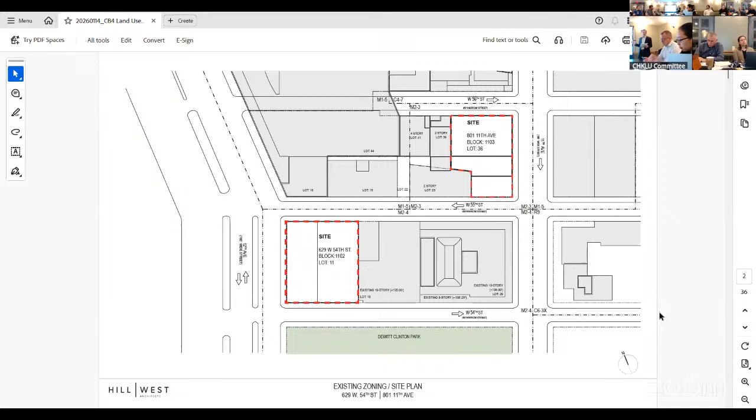We have the existing zoning map. So the 12th Avenue site is located in an M2-4 district in sub-area C2 of the Special Clinton District. The 11th Avenue site is located in an M2-3 district in sub-area C1 of the Special Clinton District.

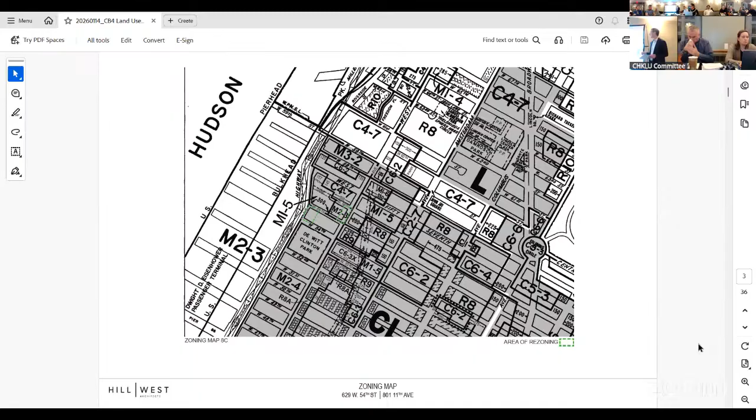Next slide, please. So taking a closer look at each of the sites, starting with the 12th Avenue site. The images here, particularly images 2 and 3, provide views of the site looking east across 12th Avenue. The 12th Avenue site is currently occupied by a 6-story building which includes an auto showroom and service center. Next slide, please.

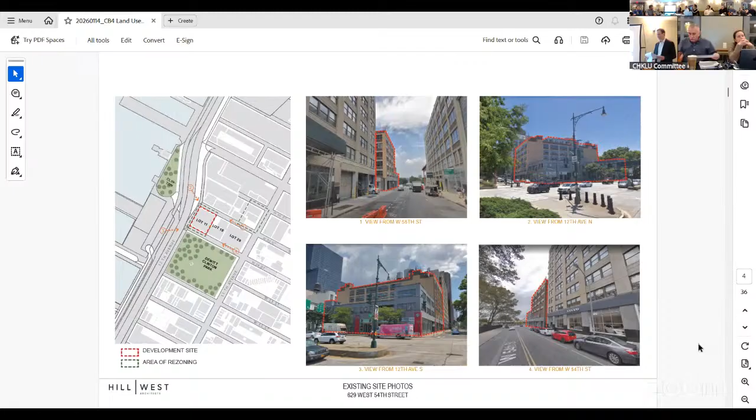Here we have a site plan of the 12th Avenue building. We're proposing a 44-story mixed-use building. The 3-story base will include 84,349 square feet of commercial auto showroom use, and the portions above will include 421,000 square feet of residential use. This will produce approximately 617 units, of which 154 would be affordable. I'll hand it over to Dave West to describe the design in more detail.

So the site plan generally, we have a 3-story commercial podium underneath a residential development. There are street walls on either side. This one is 12 stories, this one on 55th Street slightly higher, 13 stories, tower sits here, reaching a maximum height of 44 stories. The tower is oriented north-south to minimize solar heat gain as well as present its narrow face to the park. It's also positioned as far east as possible to maximize separation from the Hudson River and its park.

A 3-story podium fronts on 12th Avenue and wraps around West 54th and West 55th Streets, replicating the existing street wall condition, which is currently defined by a 2 to 3-story commercial building that sits along the 12th Avenue frontage. Go to the next slide.

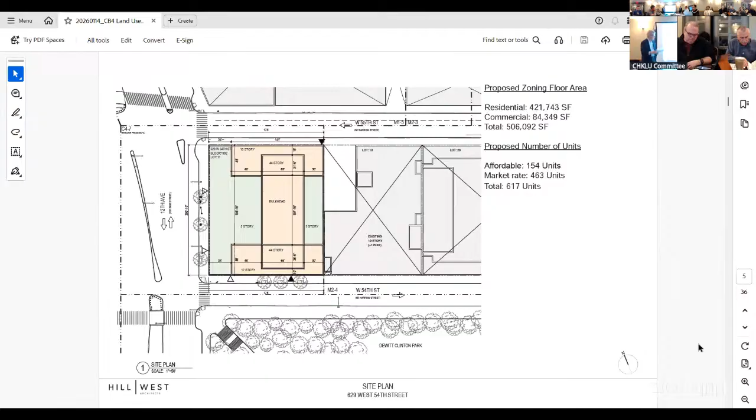The ground floor consists of both commercial and residential uses, with commercial entrances along the 12th Avenue frontage and the western portion of the West 54th Street frontage. The residential entrance is going to be located on West 54th Street, across from DeWitt Clinton Park. This creates a visual relationship with the park and will serve to activate West 54th Street, which is an important pedestrian corridor. Next slide.

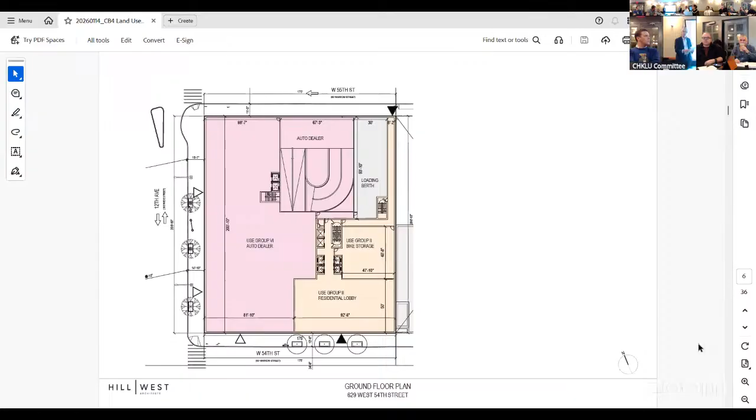Okay, so here you can see it better. There's a kind of step in the street wall. You see we're picking up the character of the existing buildings there, but we're not trying to be exactly the same. Instead, we're stepping down towards the avenue. We think that's a nice architectural move, and it kind of completes this curve that comes in here, focused on the corner. So there's a rhythm there. We put a slightly taller street wall on 55th Street just because we think that's a slightly less impactful place for that.

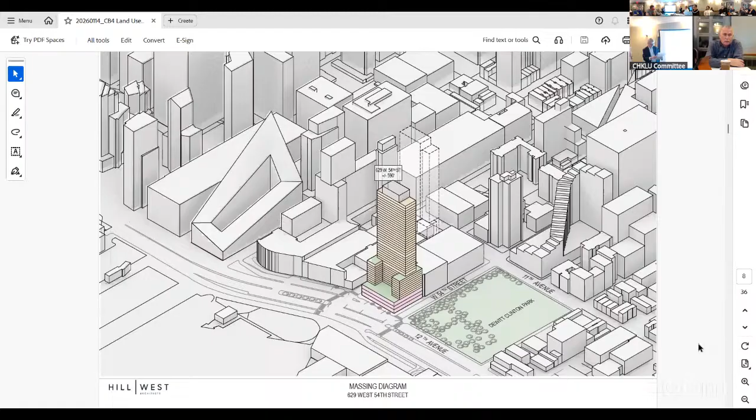Let's move on to the next slide. Okay, here you see the rendering. So we created this little inset between the residential portion and the commercial portion. We did that to emphasize the commercial portion and create a little separation. But we did want to bring the character of the residential podium down to the street.

It creates two interlocking volumes that allow the tower to visually come to the ground. We have a symmetrical tower massing, which is reinforced by a change of fenestration at the center of the tower that extends up through the bulkhead.

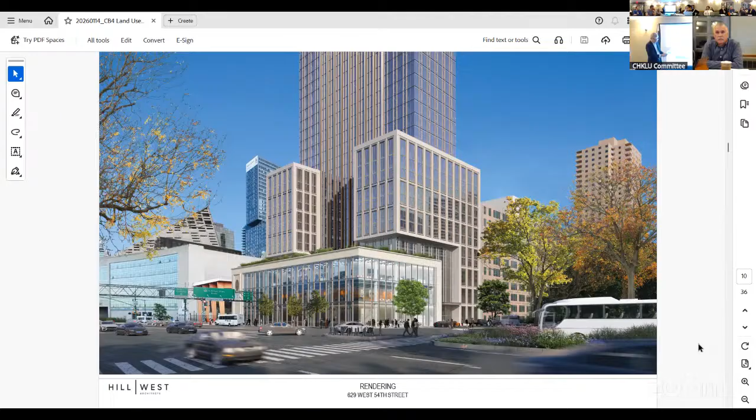The massing is further articulated through material differentiation. You're using earth tone materials at the base to define the residential portion and integrate it with the surrounding context, whereas the tower is somewhat cooler and glassier. The commercial portion has large storefront windows, giving it a strong commercial aesthetic that is very clear at street level.

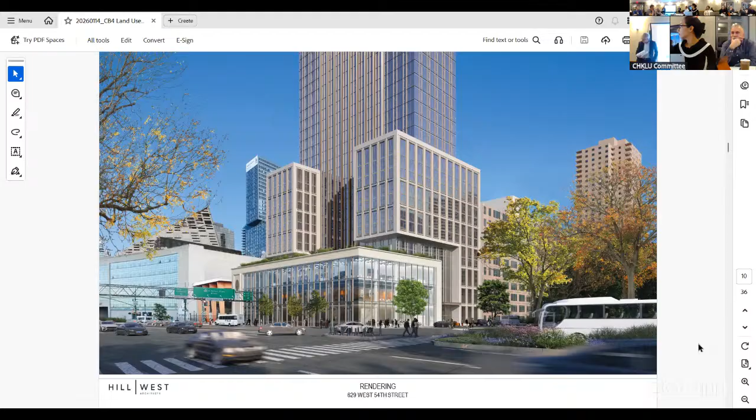Turning to the 11th Avenue site, we have site photos here. You'll recognize images 2, 3, and 4, which are looking east to the site across 11th Avenue. The 11th Avenue site is currently improved with two vacant buildings, which run up to 50 feet tall. They were previously operated as a single auto showroom, but that site is now vacant.

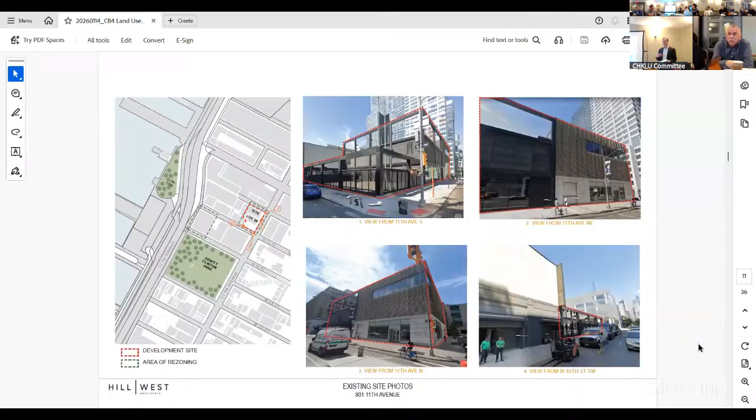So the site plan for the 11th Avenue building: we're proposing a 38-story mixed-use building. It will have 64,000 square feet of commercial auto showroom use in a 3-story base, and then 322,000 square feet of residential use in the tower portion above. This will provide approximately 477 new residential units, of which 25%, or 119, will be affordable.

Okay, thank you. Similar to the 54th Street building, we're proposing a north-south orientation to our tower. This is the tower portion. This helps reduce solar heat gain and, in this case, reinforces the axis formed by the avenue.

We have a 7-story podium that is here and here, steps down a little here and opens down to the street and the corner, which will help bring it into context with the urban streetscape.

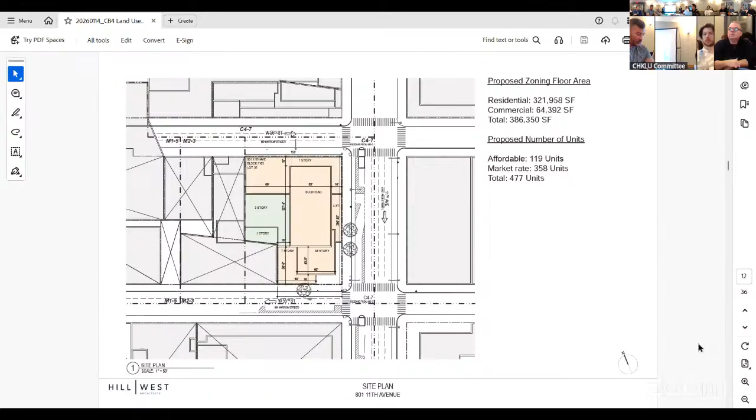Ground floor will contain commercial and residential use. Commercial entrance is located mid-block along 11th Avenue, adjacent to or across the street from other commercial entrances in the area.

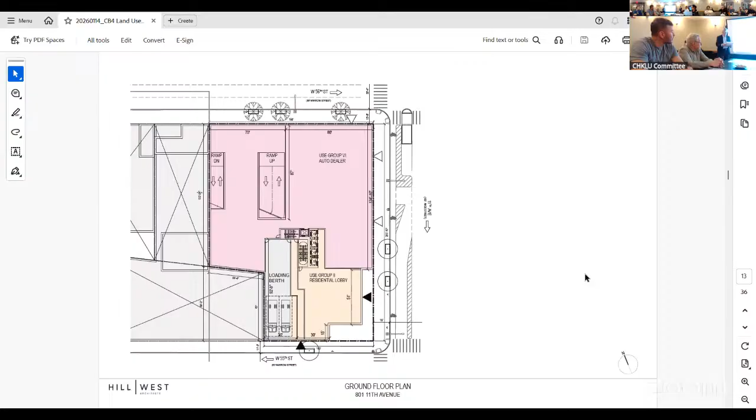The residential entrance is located right at the corner of 11th Avenue and 55th Street, which we think is the most strategic position for it in this location. We created a little entrance recess area there to get it off the avenue, but keep it strategically away from other aspects of West 55th Street, and it's located far away from the entertainment venue that we have on West 56th Street.

Like the other building, we have a 3-story commercial component in the base. As mentioned, we have a residential street wall that rises 7 stories, and then an overall height of 38 stories, 485 feet plus bulkhead.

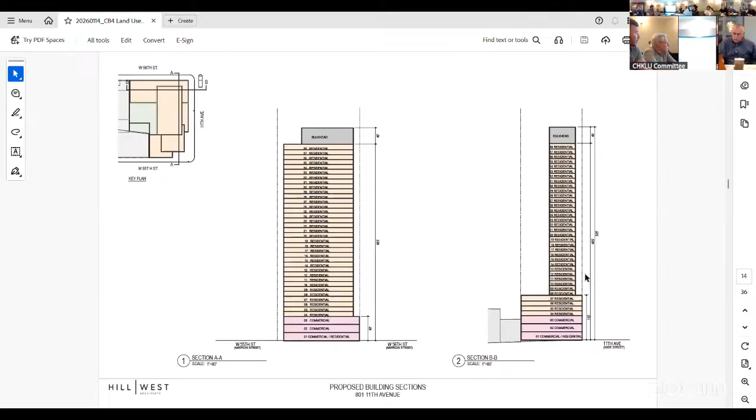In an effort to provide some distinction between the two buildings, we've articulated this one differently by creating an offset in the tower, so there are essentially two interlocked vertical elements of the tower.

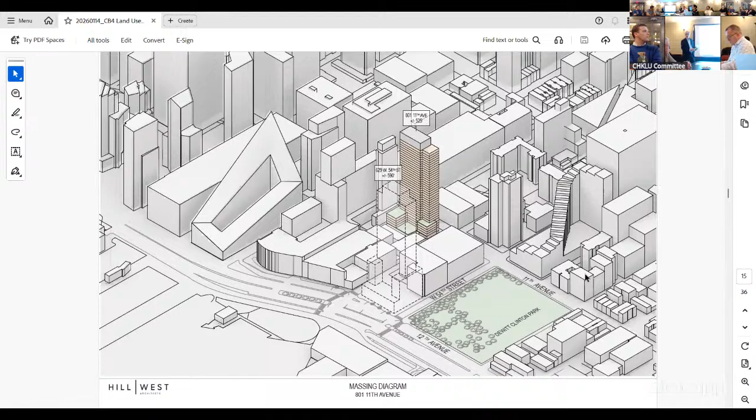We further reinforce that with the facade treatment, which you can see on the next slide. There are somewhat different facade treatments between those two components, and the bulkhead is interlocked with one of the two vertical portions, giving a strong form, I think.

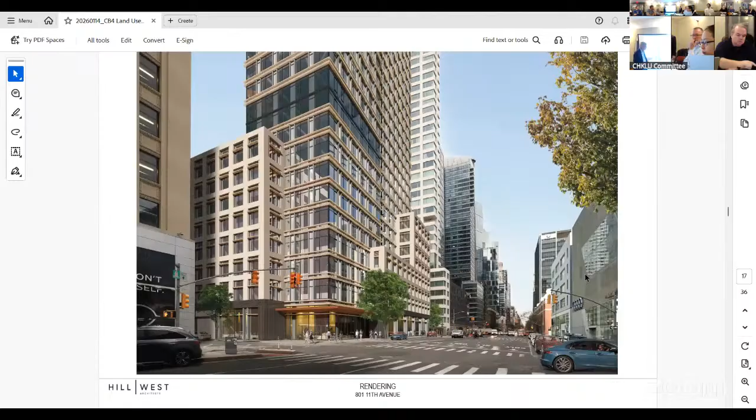I think, go one more slide, it's the better rendering. We made a real effort here to set the street wall and create some variation in it, so we think it works well with the context, and at the same time, it isn't static and boring.

There's some visual relief. This carve-out at the corner creates a visual relief that we think is very important and allows us to bring the residential character of the tower down to the street in a discreet way that still allows the commercial portion to stand alone and be important on the street.

We'll also have substantial storefront windows at the ground floor to accentuate the commercial, and we're using warmer tone materials and somewhat reduced fenestration above to transition the building scale and character into the more residential character above.

As you move along 11th Avenue, the podium steps down, first to 3 stories and then to grade. I guess that's it, I know you've all seen this.

Before we move on to the zoning actions, while we're here, if you could jump ahead to slide 29, we have a little bit more on this.

I know that there have been comments given to us about the access area at the corner. There was concern, I guess, in this district—there have been issues with unhoused people taking over these types of areas.

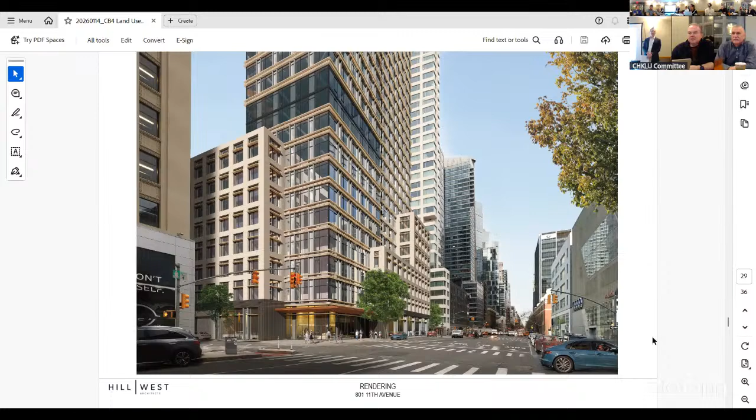If you move to the next slide, please. So I've highlighted the area shown here. We were asked to take a look at this to try to do something about it, to study further.

Next slide, please. So in response, we had proposed putting planters on that area. We were told to take a closer look at it, to see if we had any other solutions.

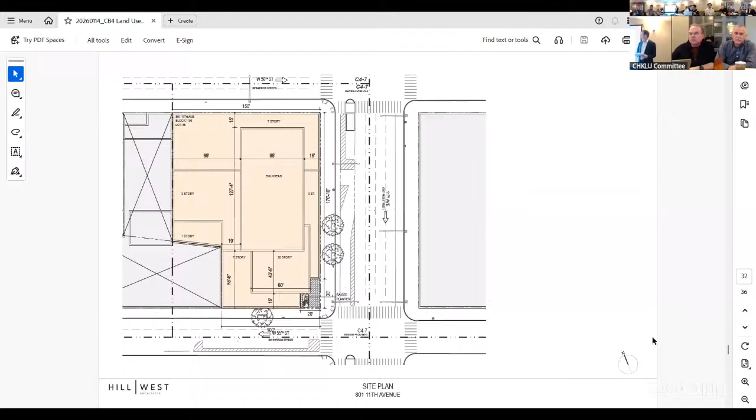So if you could go to the next slide, please. What we wanted to show you tonight was our alternative proposal. Again, we very much would like to have some articulation at that corner, but we've significantly reduced it. So what was once 66 feet along 11th Avenue has now been reduced to 30 feet. And what was previously 40 feet along West 55th Street would now be 20 feet.

So this is just one thing that we're putting out there for your consideration. We'd like your thoughts on this alternative.

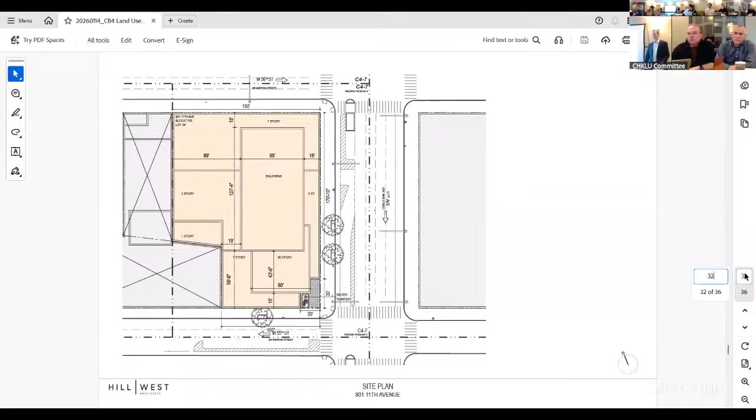So then if we go back to slide 19, we'll talk a little bit about the proposed actions. The zoning actions for these two applications are essentially the same. There are three zoning actions that they are each seeking. I'll note a few differences between the two.

Both sites are seeking zoning map amendments to rezone sites from manufacturing M2 districts to C4-7 districts, which would allow for commercial as well as residential uses in line with the surrounding community.

We're also proposing to map each of the sites within the Special Hudson River Park District, which allows for the transfer of development rights to these sites.

The second set of actions are the zoning text amendments. We're proposing to define both the granting site within Hudson River Park and these two receiving sites for the transfer of floor area. As part of the text amendments, we would also designate each of these sites for mandatory inclusionary housing. Thirdly, the text would allow for auto repair use in conjunction with the auto showroom use.

That is not otherwise allowed in C4-7. It's allowed today in the manufacturing district, so this would allow for the continuation of the auto repair uses. And then finally, it would provide for certain modifications of floor area regulations in connection with these special permits.

The special permits themselves are pursuant to Zoning Resolution Section 89-21. So at the 12th Avenue site, the special permit would allow for 84,000 square feet of development rights to be transferred from Hudson River Park to the site. It would also allow for bulk modifications, modifying the minimum base height, the maximum base height, and the minimum setback at that site.

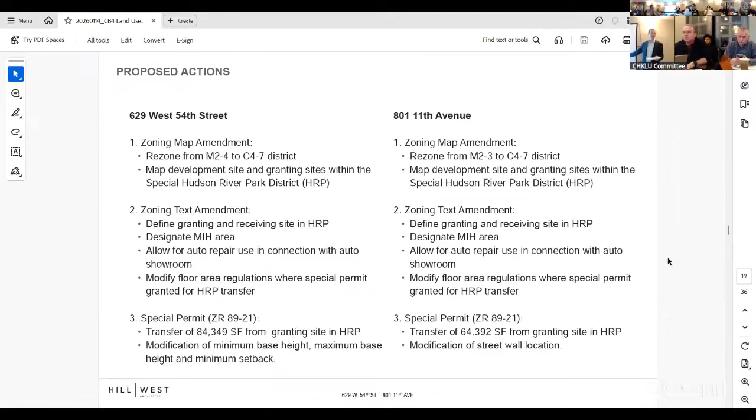Next slide, please. You have to show us the waiver diagram at some point. I'm happy to go right to that.

Actually, let's jump ahead if you would to the waiver diagrams at the end while we're on that, slide 33, please.

So this is the 12th Avenue site. There are three waivers that we are seeking here. First, the setback from West 54th Street—because West 54th is a narrow street, there's a requirement for a 15-foot setback. Wide streets allow for a 10-foot setback, which is what we are proposing here.

Also, in areas where you are adjacent to a park, you're allowed to treat it as a wide street. Adjacent meaning this way, not this way, so we think there's sufficient light and air to the side, and that this has no impact on the park. It also allows for the bulk of the building to be distributed a little bit lower.

On the West 55th Street side of the park, the maximum base height is 155 feet. So we're proposing just a slight increase to 177 feet.

That's the DOT garage on that side, so it has a lot of accent surfaces. And then finally, on the 12th Avenue side, there's a minimum 60-foot street wall that's required. Under our primary proposal, with a 3-story base, we would meet that.

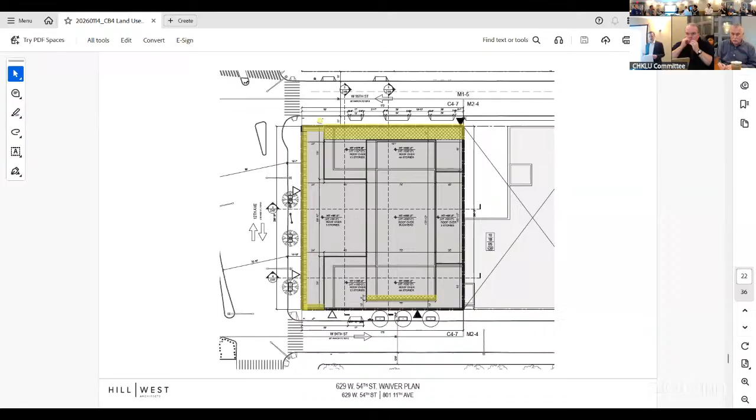Yes, you can see it cut through here. So this is on the north side of the building, just a small increase there, and there's a 5-foot increase on the south side of the building. Next slide, please.

And then at the 11th Avenue site, there's a requirement to maintain the street wall along 11th Avenue. And as we discussed, to have the setback at the corner and the residential entrance, we would propose a setback of 10 feet. So those are the zone waivers.

Nothing else on the base there? That is the only waiver we're seeking for that site.

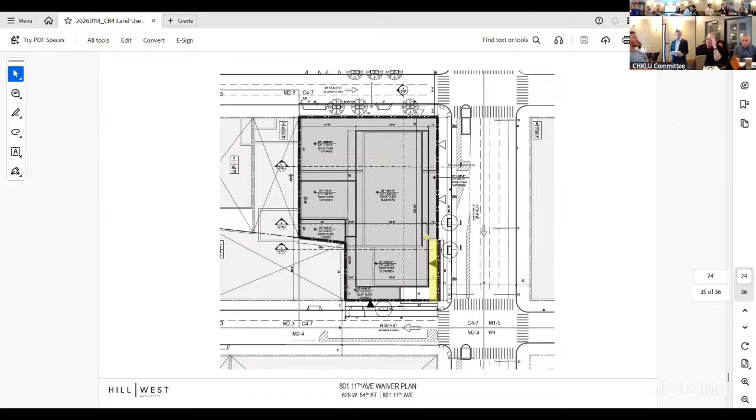Okay, back to slide 20, please. So slide 20 identifies the granting sites within Hudson River Park. There are 3 sites that have been identified, starting at the south, the Chelsea Piers, which are already granting sites under the program that we're somewhat modifying the boundaries of.

The Circle Line Piers at Piers 81 and 83, and then finally the Con Ed Pier at Pier 98. The total transfer of floor area from these 3 sites to the 2 development sites would be 148,000 square feet of floor area.

So the sale of which will provide to Hudson River Park Trust not less than $29.7 million. Hudson River Park Trust plans to allocate 80% of that to construction of a new pile-supported pier and related improvements at Pier 76, as well as the waterfront Esplanade connection in front of Pier 76.

So it's approximately 188,000 square feet for the transfer. Is that the number I heard? I'll try to get it. The total transfer is 148,000. And has the per square foot been agreed to yet, or is that still part of a discussion? There is a minimum that has been agreed to, a floor of $200 per square foot, which produces the $29.7 million. So it would be not less than that, but it's subject to an appraiser at the point in time of the actual transaction. Correct, in which case it could increase.

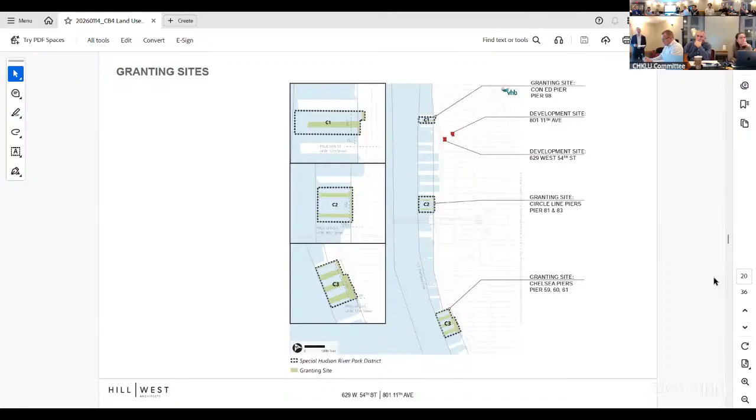As I said, 80% would be anticipated to be spent on the construction around Pier 76. 20% of the funds would be reserved for capital maintenance, with important input from the community board. Next slide, please.

As we mentioned earlier, a draft EIS has been published for this site. All the technical areas that you see here were studied in the draft EIS. In order to ensure a thorough analysis that covered all potential impacts that could result from the project, we actually studied two different scenarios.

One, referred to in the EIS as the maximum commercial scenario, looks a lot like our proposal, but an auto showroom is not a very intense use. So in the EIS, we've substituted it out and studied retail on the ground floor and office uses above, since office users would generate more traffic and pedestrians, giving us the most intense profile.

Conversely, we studied a maximum residential scenario, where if we have only one floor of commercial and the rest residential, we use that in instances where residential tenants actually produce more impacts, such as school and childcare impacts. So in the EIS, we're toggling between these two scenarios to make sure we're capturing the worst case. This doesn't change our proposal, but it captures the whole range.

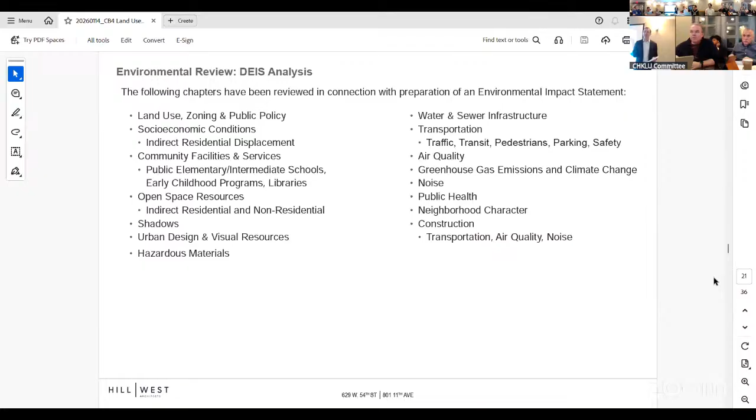Based on the studies we did, there is the potential for significant adverse environmental impacts, identified in two areas: transportation and construction. Next slide, please, and I'll go through quickly.

In the transportation analysis, there were traffic impacts identified at one intersection, 55th Street and 12th Avenue, shown here in yellow. That impact is fully mitigatable through signal timing adjustments. Next slide, please.

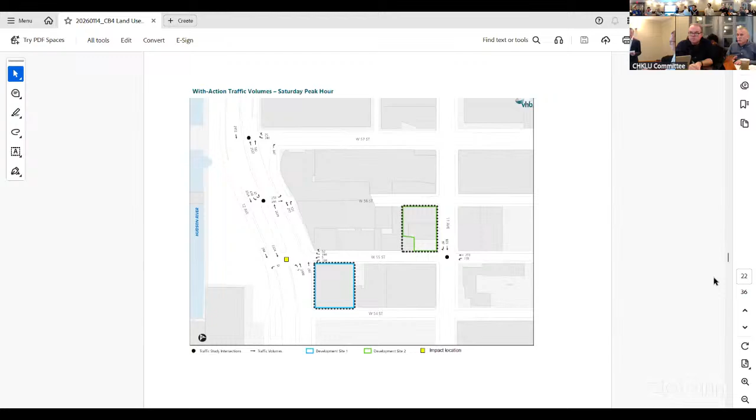Okay, so those were our operational phase transportation impacts. This moves on to the construction phase impacts.

We have construction traffic impacts, identified at 2 intersections shown in yellow during the morning peak period, and 5 in the afternoon peak period. Most of these are fully mitigatable through signal timing adjustments, except two were not: the intersections of 55th and 12th Avenue, and 56th and 11th Avenue.

They are temporary, construction phase impacts, but they would remain unmitigatable at that time. And then finally, next slide please.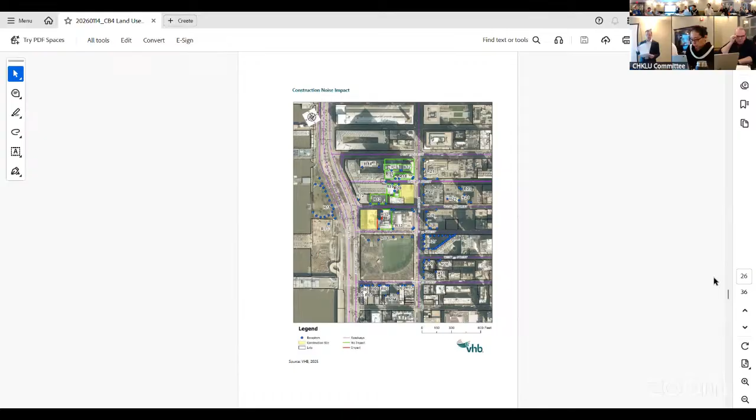Next slide. So then to conclude, we were requesting the rezoning of these two sites, which have been identified by the community board for very high density zonings.

Doing so would facilitate the construction of approximately 1,094 residential units, 273 of which would be permanently affordable pursuant to the mandatory inclusionary housing program. The purchase of unused development rights from the Hudson River Park Trust would be for not less than $29 million, which we apply to approved improvements in Community Board 4.

So in this, we ask for your support and are happy to answer any questions.